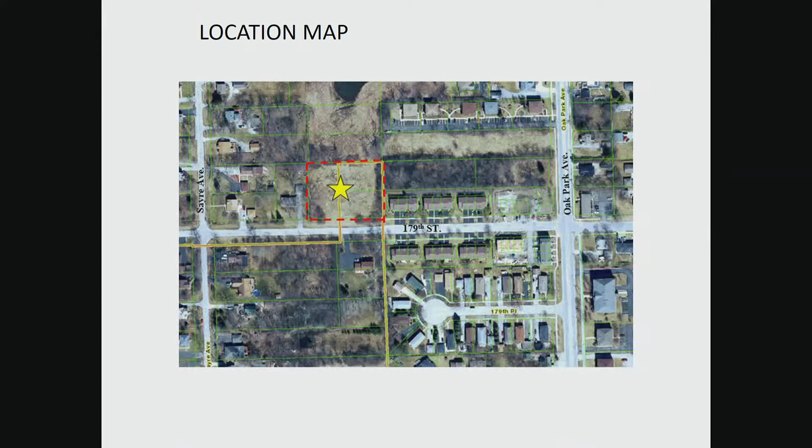If we go to the next parcel, you'll see parcel 1 and 2. Those are the 2 parcels that need to be annexed and rezoned. To the west is parcel number 3. The property immediately west of that is a single-family home zoned R1. The property north of that is part of the Settlers Pond Detention Area, owned by the village of Tinley Park.

We are also immediately adjacent to properties zoned in the Legacy District, shown by the dashed red line, which is zoned Neighborhood General. Immediately east of the subject properties, parcel 2 in this exhibit, are townhomes zoned R6. Across the street is more unincorporated property in the county, zoned R3 in the county.

Just to make sure everyone understands, every community has its own acronyms and nomenclature for zoning. So an R3 in the county is different than an R3 in the village. It's recognized as a single-family residential lot in a semi-urban environment. Hopefully that puts some context in terms of where the property is located.

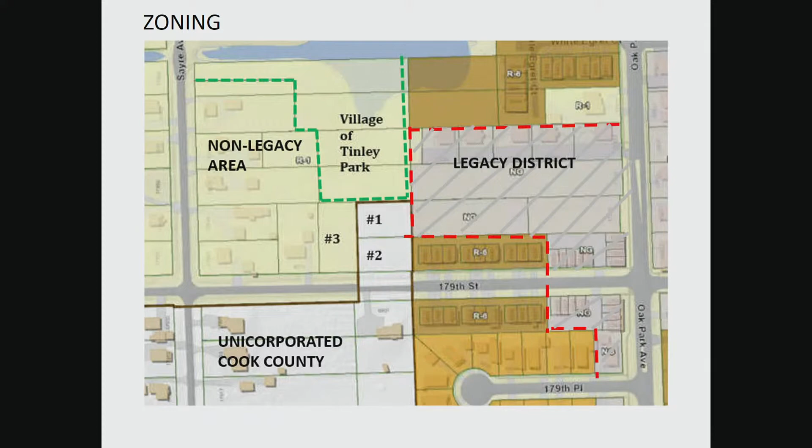As the previous slide showed, parcel number 1 is immediately contiguous to the legacy district. The reason I bring that up is there were 2 areas in the legacy plan that address this area and what future planning might look like in terms of a roadway network.

In the top exhibit, you can see a red dashed line that extends from Oak Park Avenue, jogs up close to Settlers Pond, and ends up at Sayre Avenue. The roadway framework plan was meant to provide future planning that would fill in missing connections and provide an interconnection plan, almost like the historic grid system you see more in the downtown area. You'll see 68th Court was another proposal for extending, but if you know the community and that area, the likelihood of that happening is probably not very high.

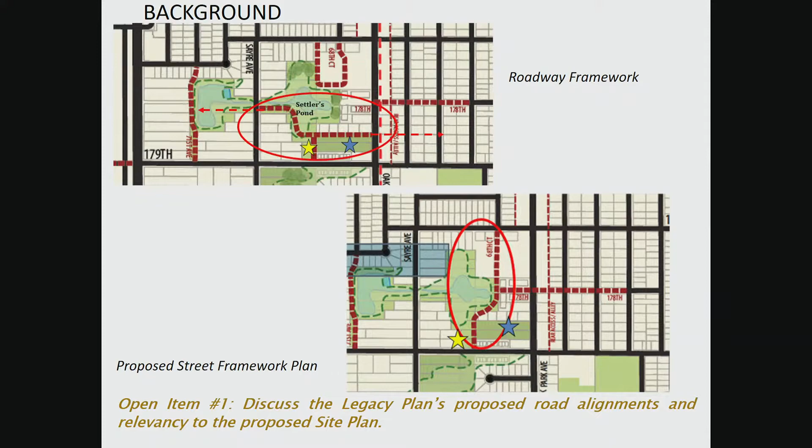Let's go to the next slide, and just to give us some understanding of how this development will lay out. As I mentioned, there are 2 buildings. A private street called Argos Court will run down the middle of it, and the 2 buildings front off of that.

So what I think has been confusing to some is when you think of a driveway and the front door of a unit, you think that is the front yard of that building. But in actuality, by definition of the village's ordinance, we look at that whole parcel there that was 3 parcels and will now be 1 parcel. The front of that lot is actually the portion of the property that fronts onto a public right-of-way, and that would be 179th Street. So as you can see on the exhibit, it says front yard, and then the side yards are labeled, and the rear yard is along the north side.

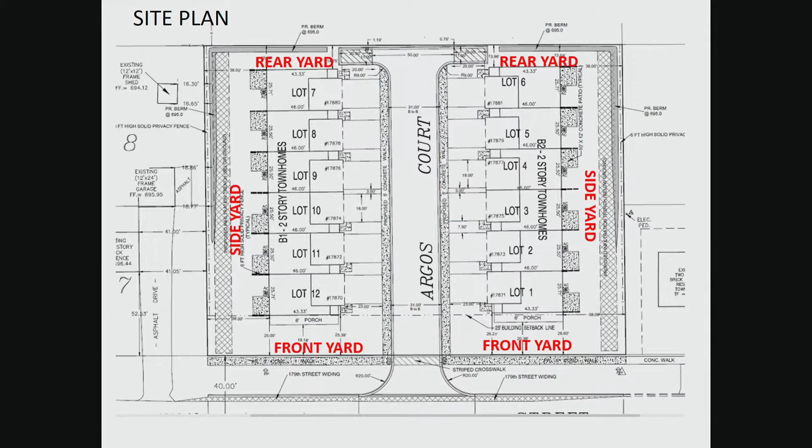I failed to mention on the last slide, but Dan, if we go back to the site plan with all the yards marked in red, I wanted to highlight the basis for the variation request. Where it's noted as rear yard, that's where the variation is being made, because it doesn't meet the legal definition of a required rear yard. As in the previous slide, there will never be any development to the north of this property, and there's already existing vegetation there, so we felt that mitigated the variation request for a diminished rear yard setback. Sorry for forgetting to mention that.

Let's move on to landscape architecture, which also ties into the variation request. Staff feels the variation is mitigated not only by the existing vegetation to the north, owned by the village and never to be developed, but also by the buffer yard requirement, which requires a certain level of planting on the east, west, and north sides of this property. Staff recommended, and the developer complied, taking some of the required planting from the north side, not all of it, since there's still quite a bit of vegetation proposed along that property line, in order to beef up the west and east sides as much as possible.

We also wanted to make sure we preserved those two large trees on the west side, so they exceed landscape ordinance requirements for the east and west sides of this property. In addition, we requested and they complied with putting up a 6-foot solid PVC fence with an attractive side facing both directions.

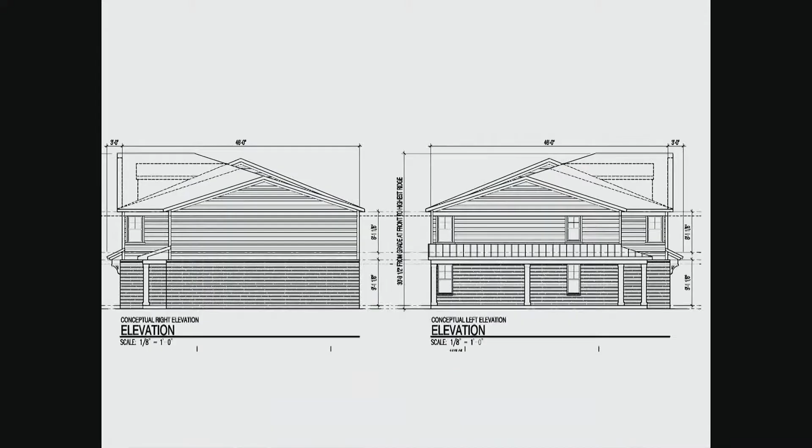If we go to the next slide, that's an elevation showing how that wraparound porch extends along the whole side of the units facing 179th Street. And if we go to the next slide, we'll get a better idea of the building materials. In the old days, when we were all in the council chambers, we passed these around, but I think they picked a very attractive palette of colors. This mystic blue and heritage gray complement the brown tones of the brick, so overall it's going to be a very attractive development.

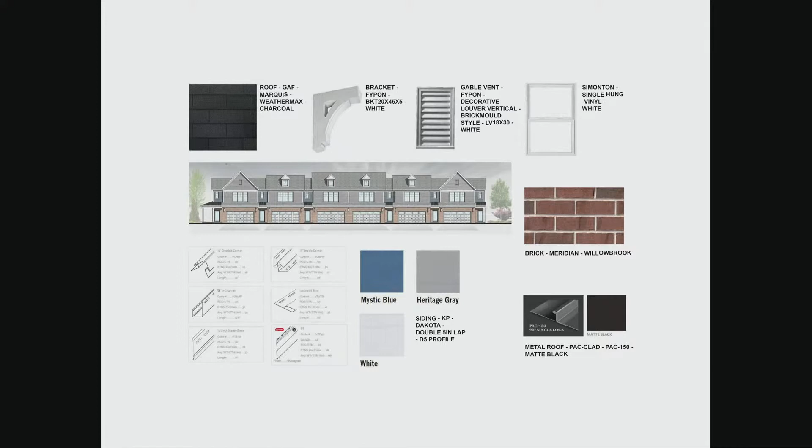If we go to the next slide, you'll see some of the things we look at for architectural review standards. They met all the requirements for building materials regarding masonry, compatible architecture in terms of context, similarity with the townhome developments to the east, and a defined entryway. The mechanical units are all in the rear of the property, immediately adjacent to the building, and they're placing 6-foot fences between each patio area, so each unit has a private area of their own, screened from the next unit.

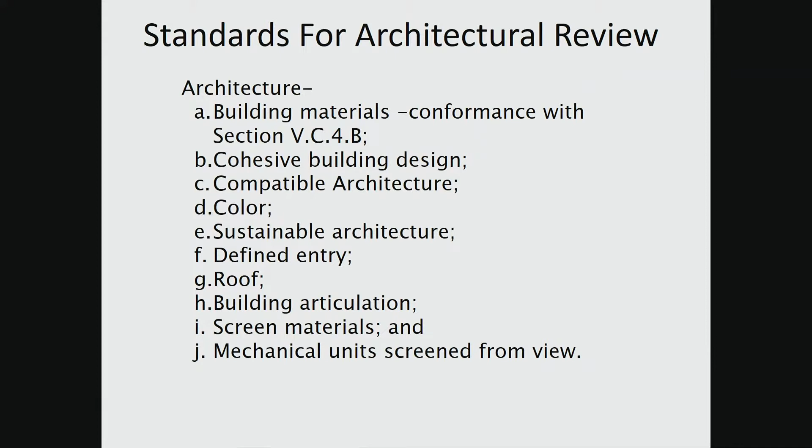With this development, we're going to be annexing parcels 1 and 2. That's just an illustration of the plan of annexation. The next slide shows how we combine those into a plan of subdivision that we call the Sunset Street subdivision. There'll be 13 lots — 12 units and then the common area will be lot 13. These have all been reviewed by the village engineer, and I am recommending, because there's always more engineering coming, that you condition your approval on final engineering approval.

I think that, Chairman, completes my report. I'd be glad to give the findings later when we're done with them.

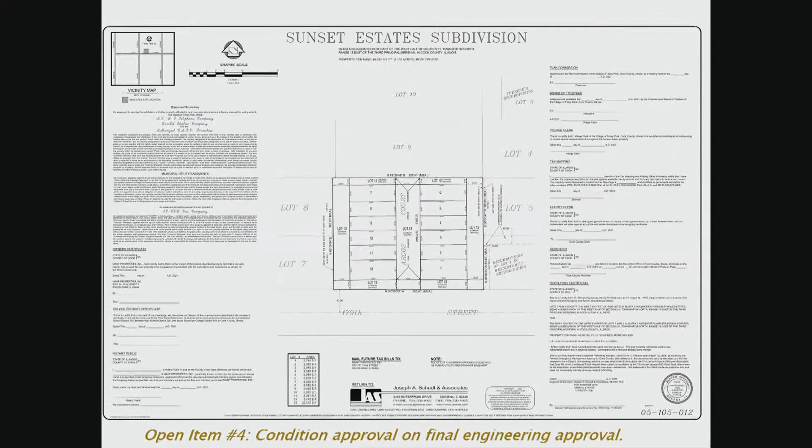This is Chairman Gray. Thanks, Paula. At this time, I will ask each of the commissioners if they have any comments or discussion for staff on any of the matters discussed. I will begin with Commissioner Vick. Any comments? I have no comments at this time, just that the staff looks like doing a really good job.

Thank you. Excellent. Commissioner Aitchison. I agree with Commissioner Vick, this is a very thorough report. Staff did a great job. I do want to say that I like the architecture on this. I think it's going to be a beautiful development, and the porch was a great addition to that.

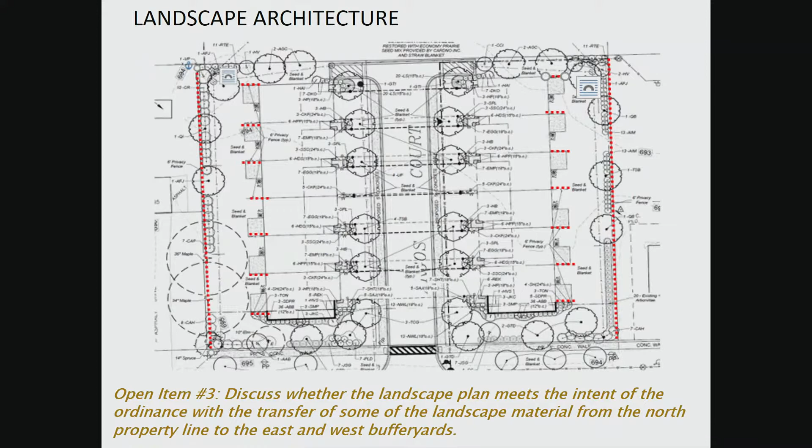Okay, excellent. Commissioner Lasciuto. Just want to again echo what the other commissioners are saying, that the staff did a really good job with this report, and I agree that this project does look good.

Okay, excellent. Commissioner Gaskell. I have no comment. Okay, Commissioner Gatto. I agree with the other commissioners, everything looks great. Staff did a great job on the design with landscaping and the fences, and I think it looks fantastic, and it'll be a great addition to that area.

Okay, excellent. Commissioner Manny. Yes, I agree, this development's gonna look nice. That's all my comments.

Okay, excellent. This is Chairman Gray. I echo what the commissioners just said. In regards to open item 2, the setback, as staff had discussed, it's a unique property, so the rear yard is not really your typical rear yard because it abuts Settler's Pond, which will never have a development behind it. So I think that open item 2 for the rear yard variation is totally reasonable.

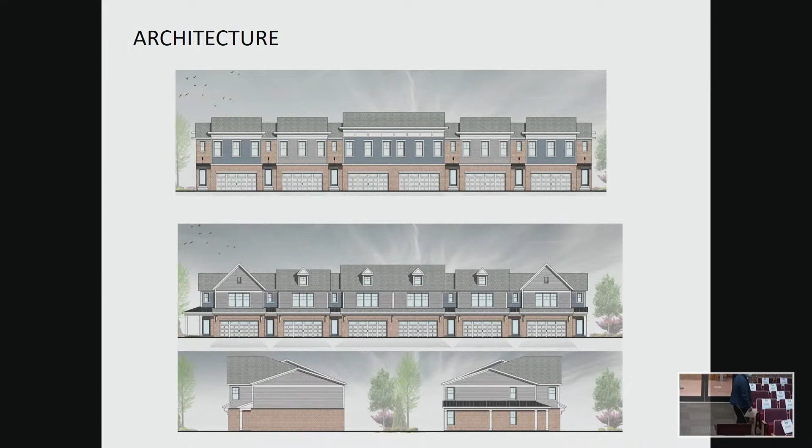Okay, this is Chairman Gray. Thank you, Tom, for your comments. At this time, I will ask if there's anyone from the public wishing to comment on this item. If so, please step up to the lectern and also state your name and address.

My name is Frank J. Zader, 17861 South Sayre. Okay Frank, if I can swear you in first, do you swear or affirm that the evidence you are about to give will be the truth, the whole truth, and nothing but the truth? Yes, it will be.

Okay, proceed. Well, I think there needs to be some consideration put into this for the neighborhood. 179th Street is a very dangerous road. There are more and more residences being built in the area. People are parking on the street. People drive very fast on that road, 50, 60 miles an hour in a 25-mile-an-hour zone.

I notice on the plan the sidewalk stops at the property line, and I feel that sidewalk should at least go down to Sayre Avenue. And really, the widening of the street is like 3 feet. So when people park on the street, farther down the road they park on both sides of the street. But when people park on the street and these people are driving 45, 50 miles an hour, it's hazardous. People have to dive into the ditch.

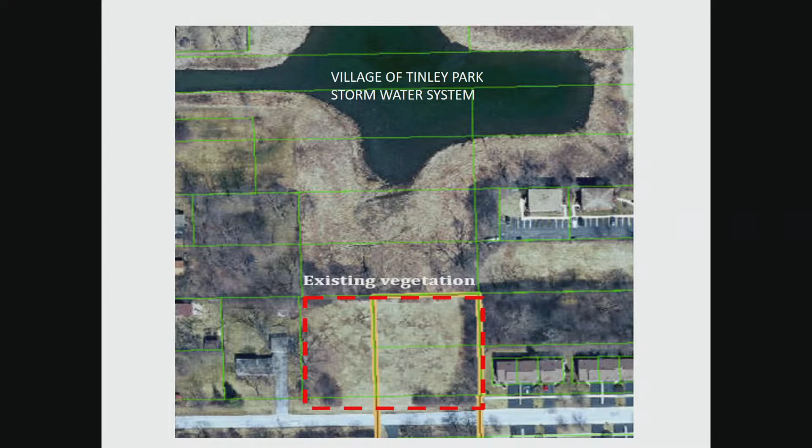Can I comment? Perfect, thank you very much. I'd like to comment on what you said. The two properties that are on 179th Street, Frank Zader speaking. The two properties on 179th Street to Sayre are both incorporated properties. The properties on the south side of 179th are unincorporated. Correct. There's not really gonna be too much more development unless they start to develop west of Sayre Avenue. That property's been for sale for 20 years.

So it would be something that would be nice if people would look into. Paula, just to give a little bit of history on the roadway, it used to be under county jurisdiction for a long time. I think within the last maybe 10 to 20 years, the village took it over, mainly due to the county's lack of maintenance on the road. So the village kind of assumed some responsibility there because we wanted to make sure that road was maintained.

At the same point, I think everybody would like sidewalks and to really have it built out like a traditional road would through there, but obviously there's cost to that. We can definitely bring it up to our Public Works Department, kind of see where it's at on the list for them to do those sidewalk gaps. I know they try and attack where there's schools first, then where there's parks, then more heavily traveled areas. They did parts of Harlem last year that had gaps on it. So this might be higher up on there because it kind of is a main connection point.

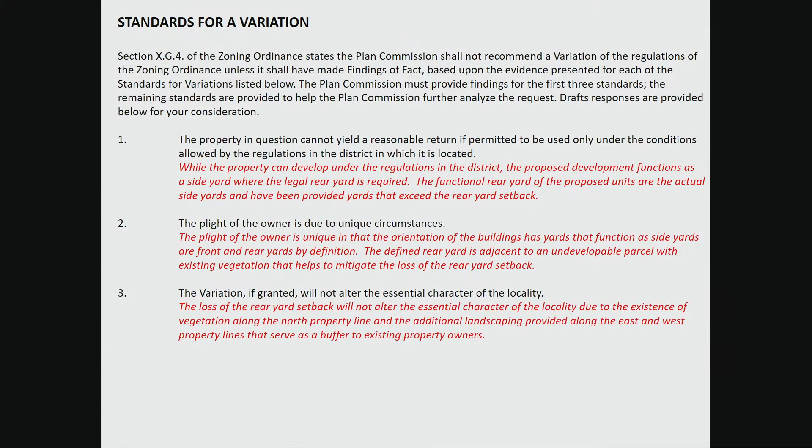Let's go next to site plan approval. We did talk about this a little bit during the staff report in terms of the standards we look at in reviewing a site plan. The first being that it is a permitted use in this district, and yes, in the R6 district it does provide for single-family attached residential. Then, as mentioned earlier, we look at off-street parking, the buildings, the lighting, and the landscaping, making sure they're compatible with the neighborhood.

One of the things that is noteworthy is that we are extending 179th Street and the public walk, which addresses safe movement of pedestrians. On the private street, we made for carriage walks, which also provides for better movement of pedestrians within the development. There's also a standard about the adequacy of the landscaping, and as I mentioned, the buffer yards on the east and west side exceed the code.

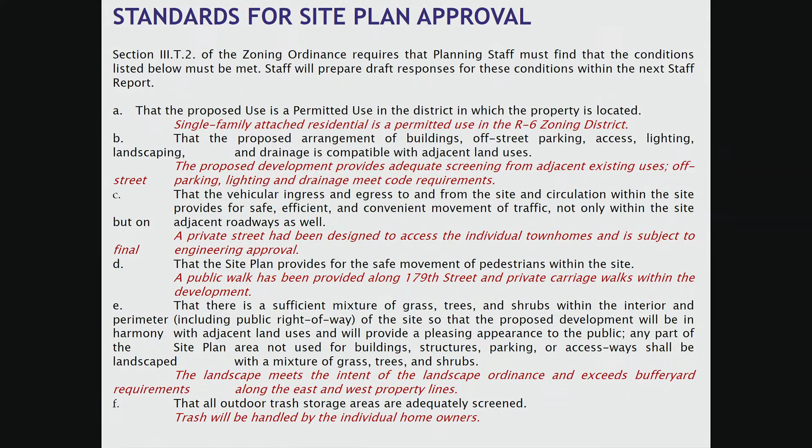The next set of standards are architectural standards. It does meet the building material standards for masonry, and it also provides compatible architecture with the neighborhood. It's a two-story unit, has some variety, and does not meet the monotony concerns of the ordinance, and between the scale and massing of the project, it presents a very attractive architecture.

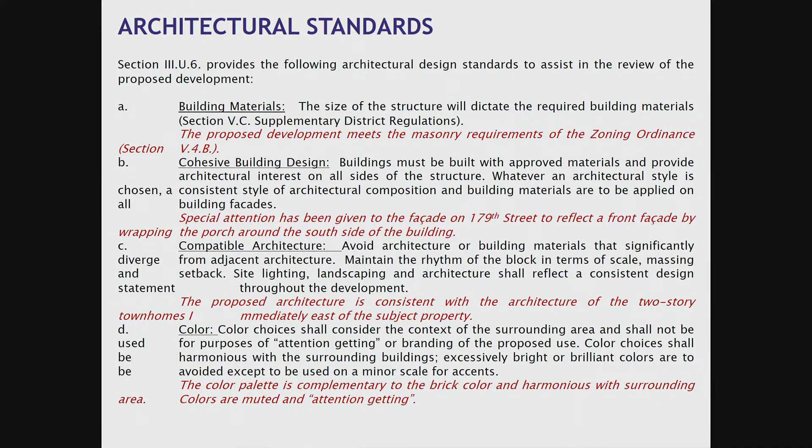I think one of the things that's noteworthy is we paid close attention to make sure that we activate the 179th Street streetscape by wrapping those south facades of both buildings with a wraparound porch. The mechanical units are all in the back, and they are screened from each unit as well as from the neighboring properties. And that concludes my standards, Chairman.

This is Chairman Gray. Thank you, Paula, for reviewing the draft standards for approval. There are four motions for this item. May I have the first motion for the rezoning map amendment approval?

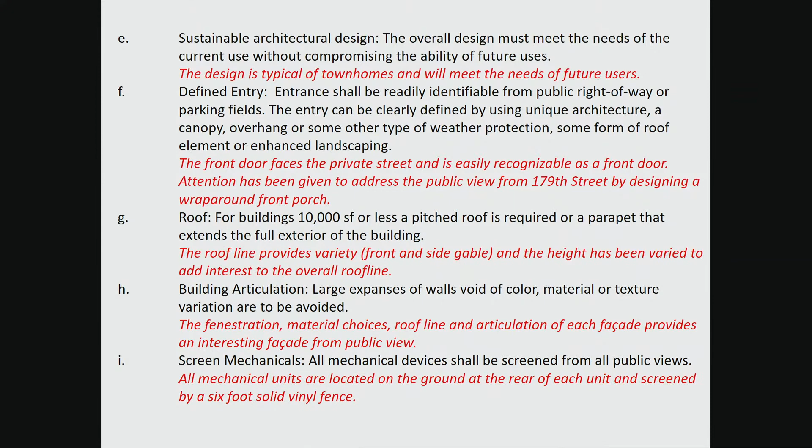This is Commissioner Aitchison. I make a motion to recommend that the village board grant the petitioner Maria Poulos on behalf of MAKP Properties, Inc., the rezoning of parcels 1 and 2 to R6 upon annexation and the rezoning of parcel 3 from R1 to R6, and adopt the findings of fact submitted by the petitioner and as proposed by the village staff in the staff report.

This is Commissioner Vick. I second that motion. This is Chairman Gray. Motion made by Commissioner Aitchison, seconded by Commissioner Vick. Secretary, may I have a roll call?

Commissioner Vick, yes. Commissioner Manning, yes. Commissioner Gatto, yes. Commissioner Gaskell, yes. Commissioner Aitchison, yes. Commissioner Loscuto, yes. Chairman Gray, yes.

This is Chairman Gray. The motion is carried. Commission, at this time, may I have a second motion for the variation?

This is Commissioner Gatto. I'd like to make a motion to recommend that the village board grant the petitioner Maria Poulos on behalf of MAKP Properties, Inc., a variation to the rear yard setback of 14.88 to 16.41 feet along the north property line, where the required minimum setback is 30 feet, to allow rear yard setbacks ranging from 13.59 feet to 15.12 feet in accordance with the plan submitted and listed herein, and adopt findings of fact as proposed by the village staff in the staff report.